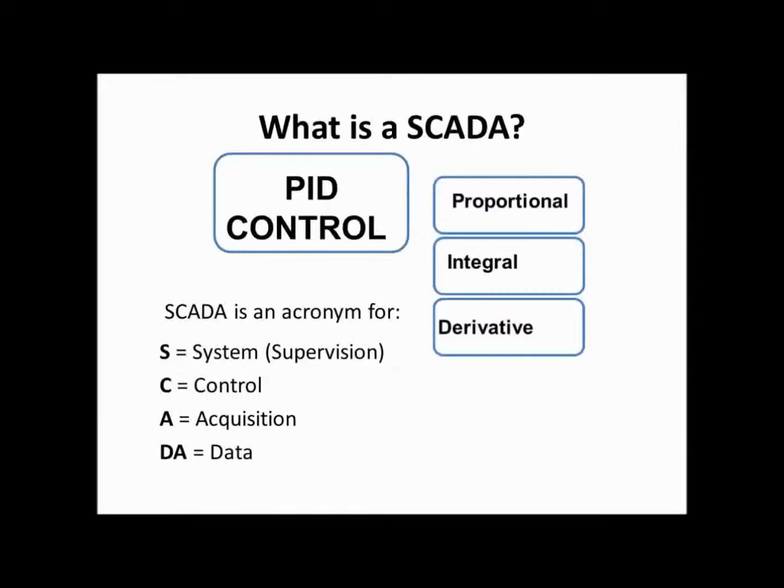With SCADA, each variable in PID can be individually manipulated. We can analyze any process in any unit by changing the proportional gain and/or integral time and/or derivative time. There are some other parameters that affect the result that can be adjusted one by one, such as gain, offset, and volts.

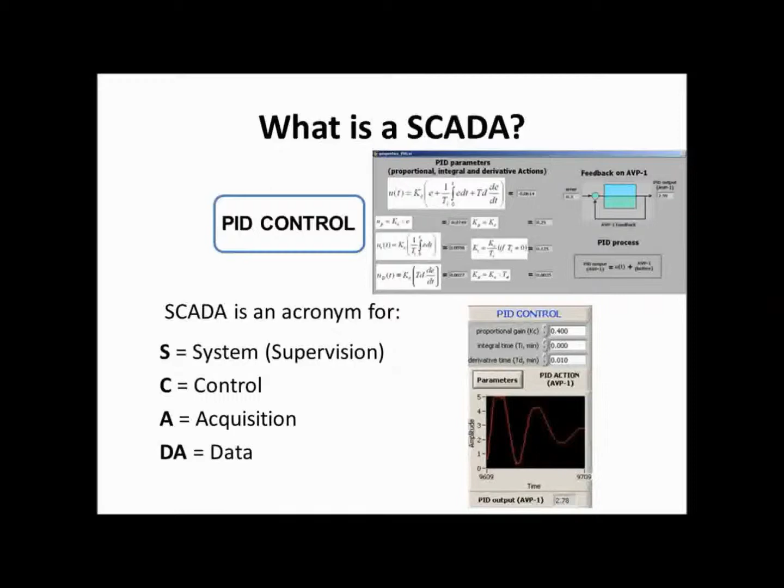Edibon's own advanced SCADA technology provides open control, multi-control, real-time control, and multi-student post. These are very important when you wish to teach at the highest level or perform research. Edibon today is the only company on the market designing, manufacturing, or selling teaching equipment that uses all of these.

SCADA is part of every one of our computerized units, available in nearly every category of our product range. We will now go into detail on the three main components of our computerized units: computer control system, data acquisition system, and computer-aided system.

The purpose of the computer-controlled system is to control any unit operation or unitary process. The industry uses all of these levels, but Edibon is the leader of this technology in the teaching market. This group allows many divisions, as follows.

These open control facilities are so important for teachers, as they can explain all concepts involved in the PID control very quickly and in a clear way for students to understand. The PID concept is not clear for most professional engineers working today in the industry, but by using the Edibon computer control SCADA with PID control, all students can get a clear concept and quick understanding, and it is easy for teachers to explain these important concepts.

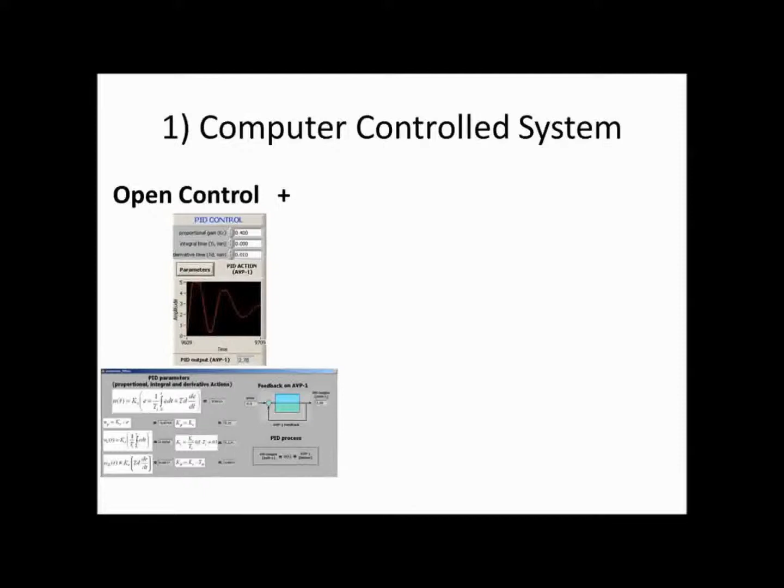Multi-control is similar to open control, but with many parameters under open control at the same time, meaning the results of multiple sensors are visible at the same time, as well as their graphed curves. Any pump, valve, etc. can also be changed at any time.

We say that we use real-time control because all of the information arriving to the computer from the unit, throughout the interface, are all electronic signals that move very fast, in nanoseconds.

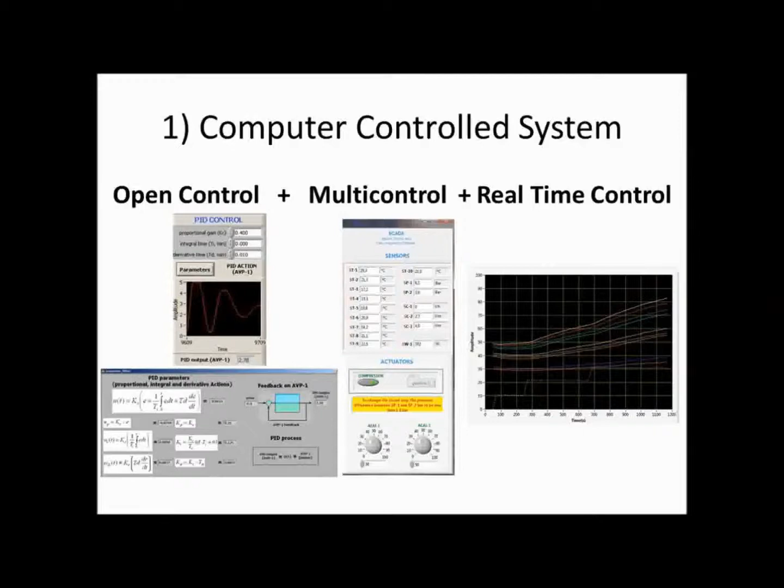Multi-student post allows multiple students to work with a unit at one time. The system allows connection to an electronic whiteboard or projector visible to the entire class. The instructor can explain to the entire class at once, as well as compare the results of the students. Most importantly, you have computer control over the unit by using the electronic whiteboard.

LabVIEW is a software structure designed by National Instruments that allows any user to design their own software for their own applications. The LabVIEW software is considered very standard and is well known in probably all departments in higher education institutions in the world.

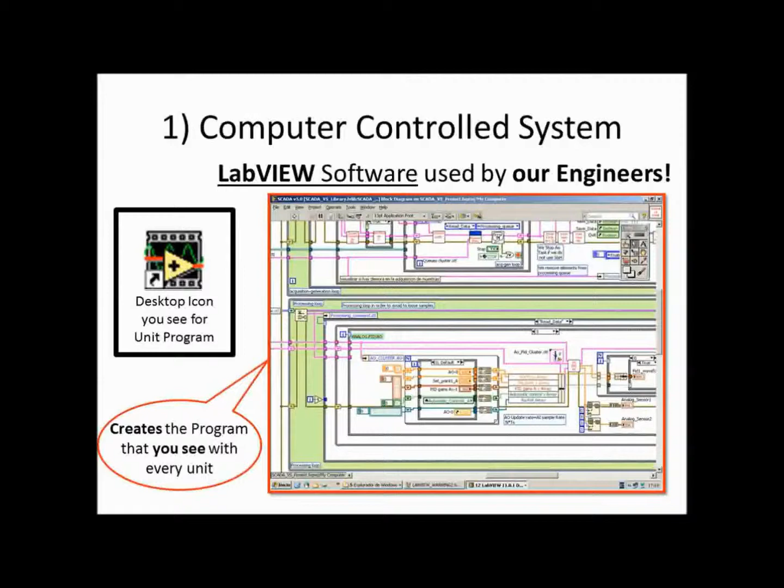Once you understand how to use the software with one unit, the other units will be easy to operate because they are all similar. National Instruments software is used globally in industrial applications or processes. Therefore, Edibon software provides valuable experience to the student.

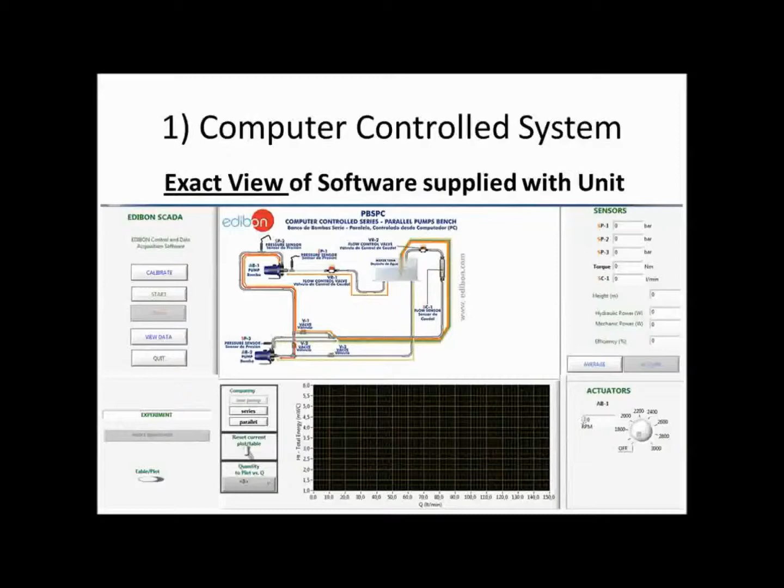Another practice possibility of the system is to use the programmable logic controller. The PLC can be used with or without the personal computer to implement each process control. It provides hands-on experience with the unit process with programming exercises, and it is compatible with requirements of industrial processes. The SCADA Net teaching system allows 30 students to work at the same time and with multiple units simultaneously.

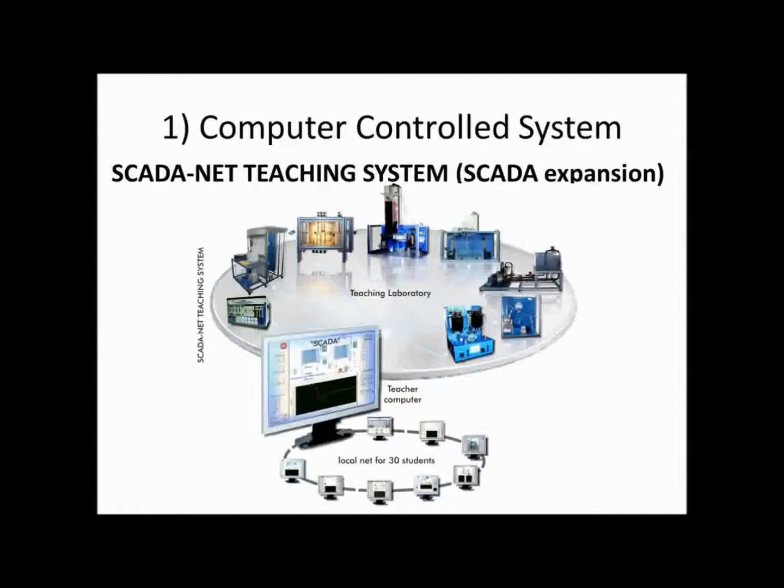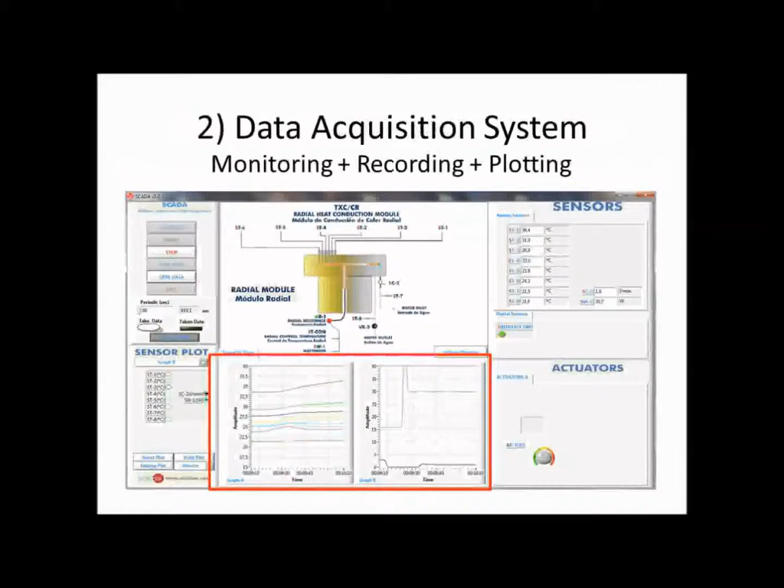Next, we would like to clarify what we mean by data acquisition system. The data acquisition system in our computerized units monitors and displays the data, records and stores the data, and plots or graphs the data. The data acquisition board has no control over the unit. It only records the data samples in the computer rather than the old-fashioned way of the student manually logging all of the data points.

Edibon uses a data acquisition board that records 250,000 samples per second, and 2.5 million for telecommunications, which is required for analyzing the curves and results.

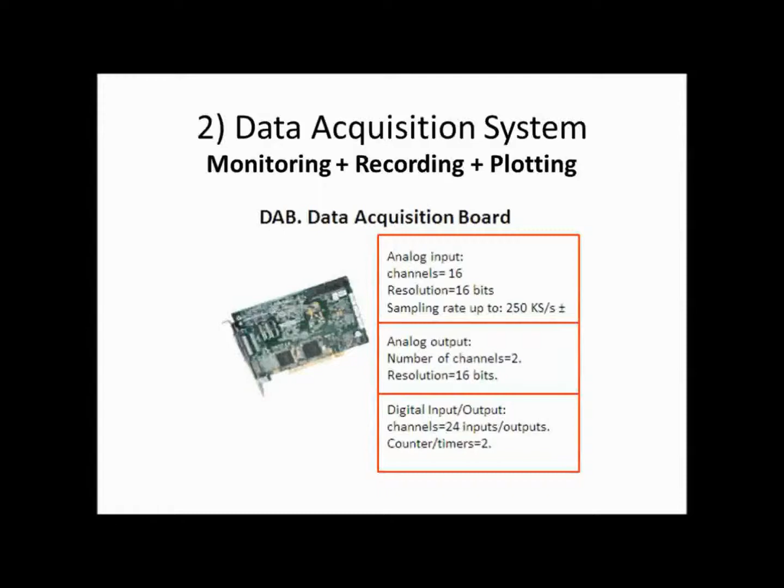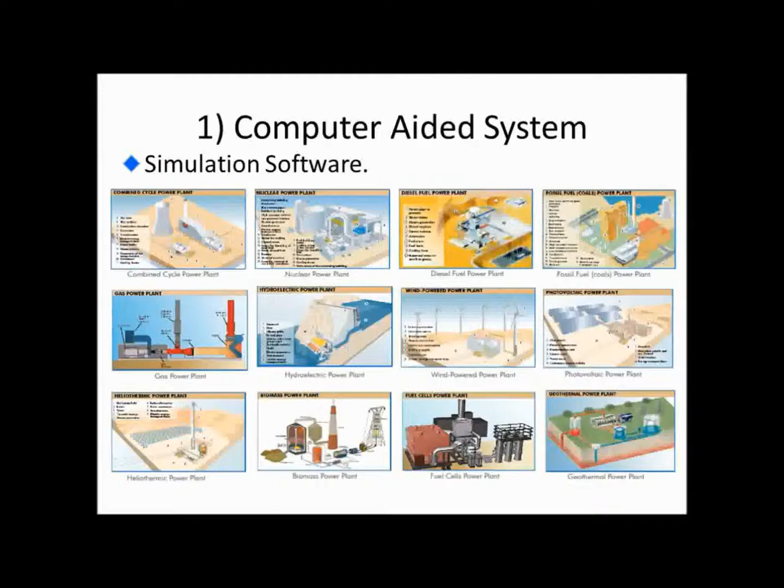Now we will move on to the computer-aided system portion of computerized units. Pure simulation software allows you to simulate the real process on the computer, but all the data handled is theoretical. Edibon only uses this in complex, high-tech electronics.

Teacher's CAI allows the teachers to organize and control the students. They can view the students' progress and detect difficulties. They can assess them with exams, etc.

The student CAI provides a detailed explanation of the theory. It also has practice exercises in which the computer guides the student. These two computer-aided instruction software systems are available for basic electronics, digital electronics, basic electrical concepts, electronics applications, and controls. View the catalog for exact units.

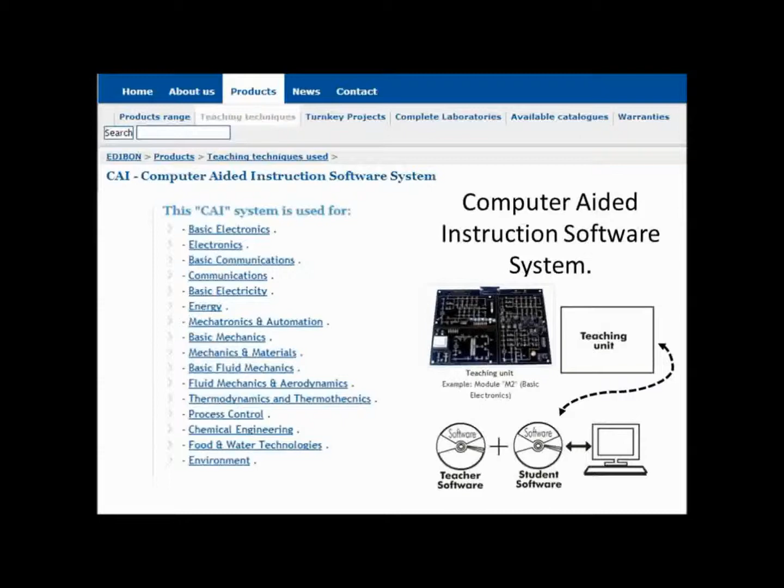The CAL calculation software makes calculations and plots the curves of the data by using the appropriate formulas. This software is available for basic fluid mechanics, basic electronics, telecommunication, electricity, and mechanics.

The Edibon teaching units are the only ones in the market providing total safety. So what does this mean? Suppose the mechanical or electrical device fails for any reason, meaning the pressure switch is broken, blocked out, or cut out for bad student intention. If this is the case, the electronic device works and cuts off in case pressure increases to a dangerous level.

How does it work? The pressure sensor is regulated for working in a particular range, sending proper millivolts or milliamps to the electronic interface. So if this amount exceeds the limit, the electronic system in the interface cuts off.

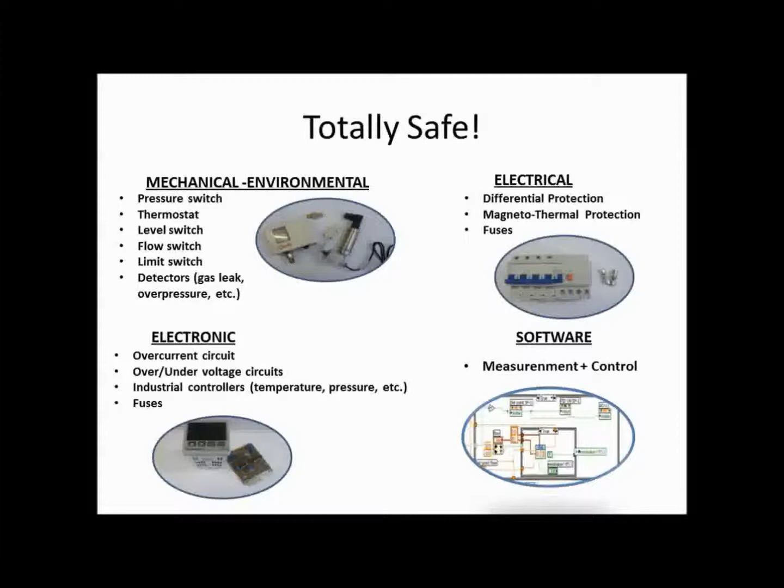But suppose that the mechanical safety device fails and the electronic safety device fails, or the student cuts it out. In this case, the software device operates, as the software package has been designed for working only inside a particular pressure range. We explained the situation with pressure, but this philosophy can be applied to any sensor used in any Edibon computer-controlled unit. When a teacher buys Edibon...